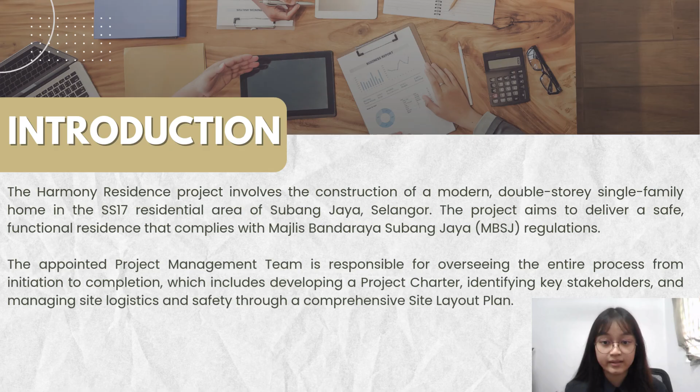The project charter includes some key components: project background, objective, scope, stakeholders, risk, and constraints.

For the background, the Harmony Residence System project was born from a need for a modern 3,000 square feet double-story home in Petaling Jaya for our client, Mr. John Smith. Our goal is to provide a smart, energy-efficient home that stands out in the current market.

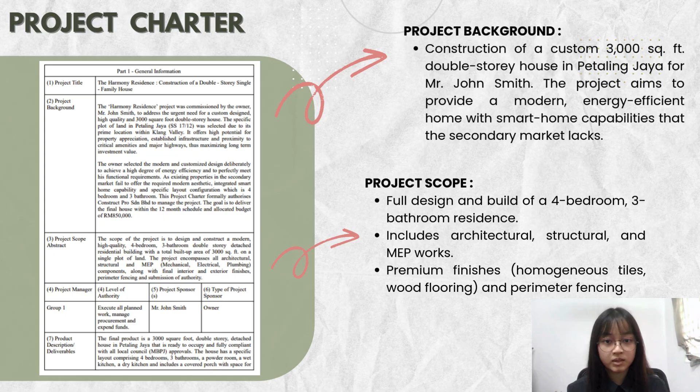The scope is comprehensive. We are delivering a full design and build for a 4-bedroom, 3-bathroom residence system. This includes all architectural, structural, and MEP work finished with premium materials like homogeneous tile and wood flooring.

Next, the project objective. We have defined 3 clear success criteria for this project. The first is time: we aim to complete the build and secure the certificate of completion and compliance within 12 months, specifically by 31 December 2026. For the cost, we are committed to staying within a strict budget of 850,000 ringgit. For safety, our target is zero accidents or lost time injury throughout the entire construction phase.

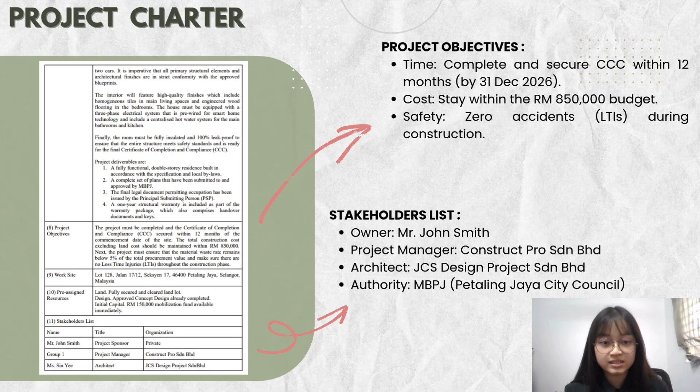To achieve this, we have assembled a strong team, which includes the owner, Mr. John Smith, Project Manager Construct Pro Sendirian Berhad, Architect JCS Design Project Sendirian Berhad, and the Authority MBPJ, which is Petaling Jaya City Council.

For the component of project constraints, first we are operating under a fixed budget of 850,000 ringgit. This is a hard cap, meaning our resource allocation and procurement must be incredibly focused to avoid any overrun.

Second, we have a strict operational window. Construction and on-site activity are limited to Monday through Friday, from 8 a.m. to 6 p.m. We have no weekend or after-hour flexibility, which puts a premium on daily productivity.

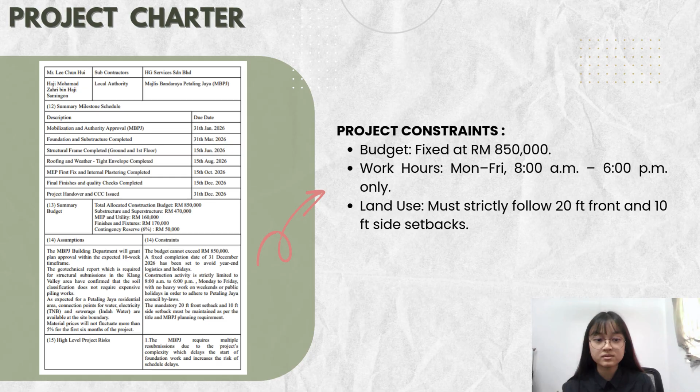Finally, from a regulatory standpoint, we must strictly adhere to land use setbacks, specifically a 20-foot front setback and 10-foot side setback. This is non-negotiable for MBPJ approval.

Now, let's look at the risks we need to manage to keep this project on track. We have identified 4 key areas of concern.

Firstly is permit approval. Our first hurdle is potential delay in MBPJ permit approval, which could put back our start date. Secondly is neighbor complaints.

Since we are in a residential area, noise and dust are major factors. Too many complaints could lead to fines or a forced stop to our work.

Next is traffic congestion. Traffic in Petaling Jaya is a real challenge. This can cause delivery delays for critical materials like concrete and steel.

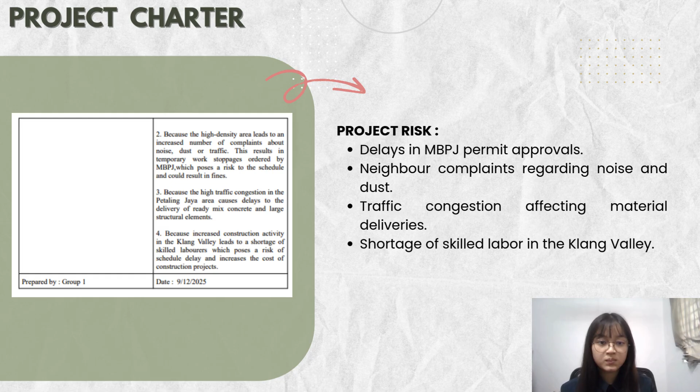For labor shortage, finally there is a high demand for skilled workers in the Klang Valley right now. This makes it harder to find the right team and could increase our costs.

In this section, we identified the key stakeholders for the Harmony Residence project to ensure clear lines of authority. We have classified them into 2 groups.

First is internal stakeholders. This includes our client, Mr. John Smith, who provides the capital, and ourselves, Group 1, acting as the project management team responsible for execution.

Next is external stakeholders. These are our partners and regulators. We work closely with Ms. Xin Yi, our architect, to ensure all designs meet MBPJ standards enforced by Haji Mohamad Zahri. For the actual build, we have appointed Mr. Lee Chun Hui from HG Services as our main subcontractor.

In this part, we established a functional organization structure. At the top, we have the project sponsor, Mr. John Smith, who holds the ultimate authority. Reporting directly to him is our team, Construct Pro Sendirian Berhad, acting as the project manager.

We serve as the central hub, coordinating with Ms. Xin Yi, architect, for design and technical issues, MBPJ for regulatory compliance, and HG Services for the actual physical construction on site. This structure ensures that all instructions flow through the project manager to avoid confusion on site.

For this communication flow section, we established a communication matrix to manage the tight 12-month schedule and the residential site constraints. Internally, we have daily briefings with our subcontractors to ensure safety and workflow on site, and weekly technical meetings with our architect to resolve design issues quickly.

Upwards, we report to client Mr. John Smith on a monthly basis regarding budget and schedule performance. Externally, we have a critical line of communication with MBPJ for milestone inspections and with the neighbors to manage compliance regarding noise or dust.

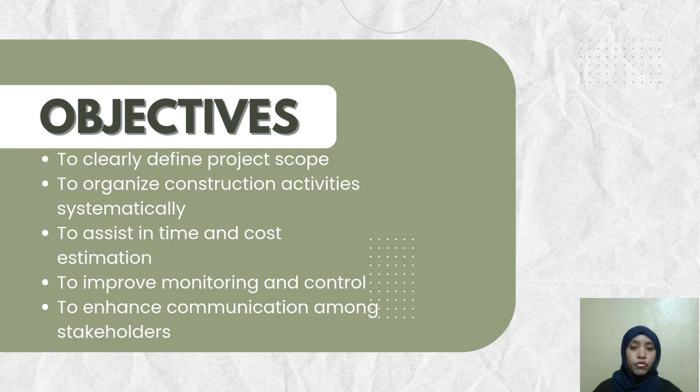The WBS for this project is organized into 7 principal levels corresponding to major phases of the construction life cycle. Each level is further subdivided into work packages representing specific construction activities. This hierarchical structure enables clear definition of responsibilities, accurate resource allocation, and systematic progress monitoring.

Firstly is mobilization and authority approval. These phases encompass initial project establishment and regulatory compliance. Preliminaries include site mobilization and the provision of temporary site facilities necessary to support construction operation. Statutory approval involves submission to Majlis Bandaraya Petaling Jaya (MBPJ) and application to utility authorities such as TNB, Tenaga Nasional Berhad, Air Selangor, and Indah Water Consortium (IWK). Project management and compliance activities focus on project scheduling, coordination, and implementation of safety, health, and environment systems to ensure adherence to statutory requirements.

Second is foundation and substructure works. These phases comprise all below-ground construction activities. Site preparation includes site clearing, setting up, and excavation works. Substructure construction involves piling operations, followed by the construction of pile caps and ground beams. Foundation works consist of footing, base slab construction, and concrete works, including curing processes to achieve the specified strength and durability.

Third is structural frame. This phase focuses on the formation of the primary load-bearing structure. Ground floor works include the construction of columns, beams, and floor slabs. First floor works involve the erection of upper level columns, beams, and slab construction. Structural quality control activities include reinforcement inspection and concrete testing to ensure compliance with design specifications and relevant standards.

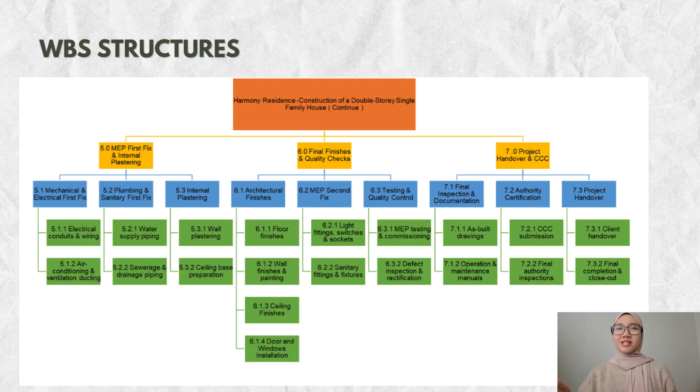In conclusion, the developed WBS provides a comprehensive framework for managing the Harmony Residence project. By systematically decomposing the project into clearly defined phases and work packages, the WBS enhances planning efficiency, facilitates effective monitoring and control, and contributes to the successful delivery of the project in accordance with specified objectives.

Now, I'll explain the site constraint and planning considerations that affect the site layout, construction process, and overall project management. First, I'll talk about the site location and surrounding environment.

The project site is located in a mature residential neighborhood in Petaling Jaya and is surrounded by occupied double-story landed houses. Because of this, the site is highly sensitive to construction impact such as noise, dust, vibration, visual intrusion, and increase in traffic movement. Compared to an isolated industrial site, this location faces much greater public scrutiny, and there is also a higher risk of resident complaints being made to MBPJ, which could result in inspection or even temporary work suspension.

As a result, several site layout controls are required. These include the provision of perimeter hoarding, controlled access points, and effective dust suppression measures. In addition, construction activity must be carefully sequenced to minimize disturbance to surrounding residents, especially during noisy work.

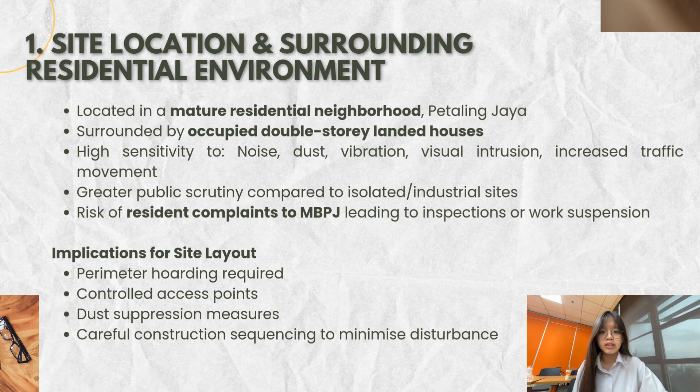Second, I will discuss site access and traffic conditions. Access to the site is via a very narrow residential route. Traffic along this route is moderate to heavy during peak hours, so this creates a logistical challenge for concrete trucks and material delivery lorries as the space is limited. If not properly managed, this situation increases safety risks to nearby residents and other route users.

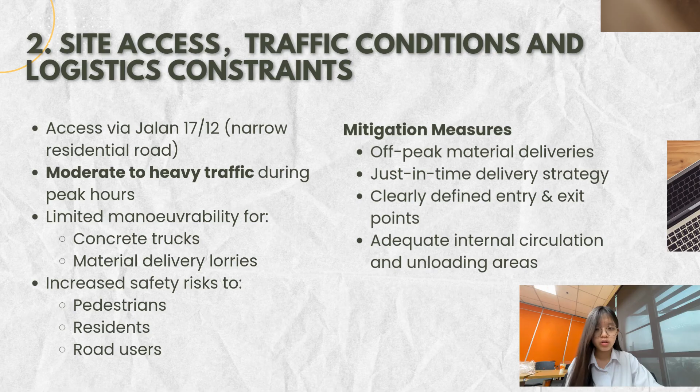To manage this issue, several mitigation measures are proposed. Material delivery will be scheduled during off-peak hours and a just-in-time delivery strategy will be adopted. Entry and exit points will be clearly defined and adequate internal circulation routes and unloading areas will be provided to reduce congestion and improve site safety.

Next, I'll explain the planning and regulatory constraints imposed by the local authority. The project is subject to MBPJ planning and building control requirements, which include a 20-foot front setback and 10-foot side setback on both sides. This requirement reduces the buildable area and usable site space.

In addition, the project must comply with regulations related to noise control, dust suppression, proper waste disposal, and traffic management with appropriate signage. Because of this requirement, the site layout must be carefully planned. Temporary facilities need to be positioned efficiently, and the overall layout design is driven by compliance with statutory regulation.

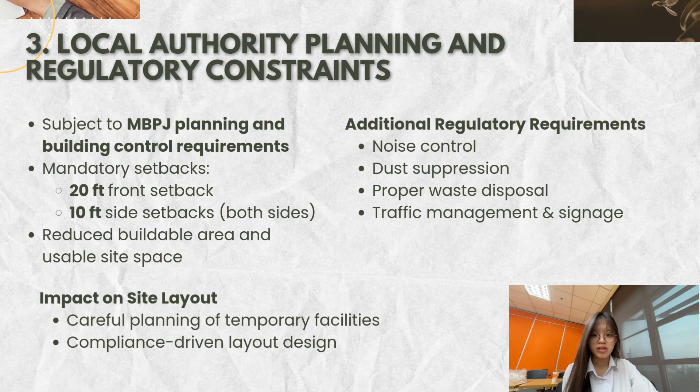After that, I'll move on to working hour restrictions and their impact on productivity. MBPJ allows construction work from 8 AM to 6 PM on weekdays, with restricted work on weekends and public holidays. This restriction limits the time availability for noisy or heavy construction activity and reduces scheduling flexibility, which can affect productivity if not properly planned.

To overcome this, several productivity strategies are adopted. These include an efficient site layout, shorter material travel distance, clear circulation routes, and well-coordinated construction sequencing. These measures help maximize productivity within the permitted working hours.

Next, I will discuss the site space and material management constraints. After accounting for statutory setback, the remaining site area is limited. This space must accommodate the site office, welfare facility, material storage, waste skip, and equipment parking. Due to the space limitation, large-scale material stockpiling is not possible.

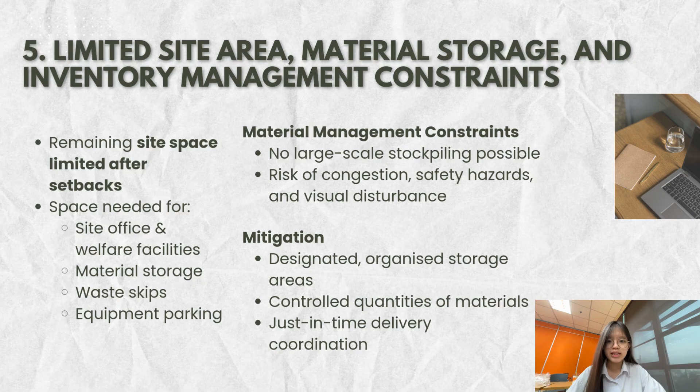Without proper control, this could lead to congestion, safety hazard, and visual disturbance. To address this, designated and well-organized storage areas are provided. Material quantities are strictly controlled, and a just-in-time delivery approach is used to minimize on-site storage requirements.

Lastly, I'll talk about security and public safety considerations. The open residential environment increases the risk of unauthorized access and public accidents, especially involving children. This risk may also result in legal and reputational issues if not properly managed.

To manage this risk, secure perimeter hoarding and lockable material storage, controlled entry and exit points, and clear signage with physical barriers are provided. Overall, this security requirement directly influences the placement of site facilities and the planning of internal circulation routes, making safety and security a key factor in the site layout design.

For this session, I will discuss the comparison of project duration and scheduling among the group members. Although all project plans are developed for the same double-story bungalow, there are clear differences in overall duration and scheduling strategy. The comparison of project duration among group members shows significant variation, even though the scope and building type are identical. The overall project duration ranges from 191 days to 240 days.

Ong Jing Wen's project plan has the shortest duration of 191 days. This is achieved through an accelerated construction approach that overlaps major construction phases. By allowing concurrent activities, the project achieved higher time efficiency and reduced time-related costs. However, this schedule has very limited float along the critical path.

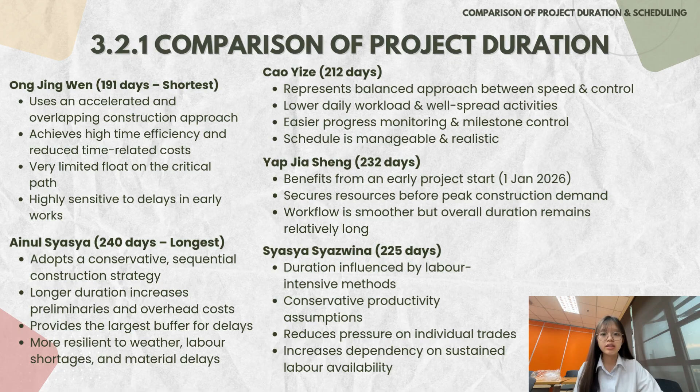Syasya Syazwina's project plan has a duration of 225 days. The longer duration is mainly due to labor-intensive construction methods and conservative productivity assumptions. While this reduces pressure on individual trades, it increases dependency on sustained labor availability and extends the overall project duration.

Ong Jing Wen's project employs an aggressive fast-track scheduling strategy with a high level of task overlap. Finishing work is allowed to begin while superstructure work is still ongoing. This approach maximizes time efficiency and achieves the shortest completion period. However, it requires coordination between trades to prevent site congestion, safety risks, and potential rework.

Ainul Syasya's schedule follows a traditional linear sequence method, where each construction stage is completed before the next begins. This reduces coordination complexity and improves site safety. The clear handover between trades also makes progress easy to monitor. However, this approach results in a longer overall project duration.

Cao Yize's schedule strategy focuses on high-value, low-labor activities with strong emphasis on procurement and the use of specialized subcontractors. The lower work density simplifies monitoring and reduces daily management pressure. However, this strategy increases dependency on timely material delivery, making procurement a critical factor in maintaining the schedule.

Yap Jia Sheng's project adopts a balanced scheduling strategy with logical sequence and moderate task overlap. The early start provided an advantage in securing shared resources before the peak demand period. However, strong monitoring during the early stage is essential to maintain this advantage throughout the project.

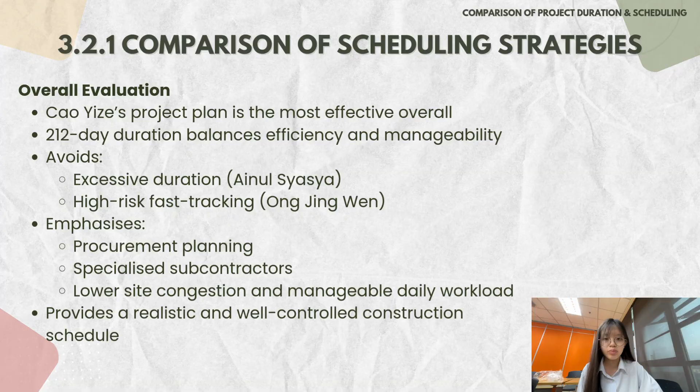Overall, Cao Yize's project plan is considered the most effective among the group members. With a duration of 212 days, it avoids the excessive length of Ainul Syasya's plan while being more manageable than Ong Jing Wen's fast-track schedule. Its emphasis on procurement planning and specialized subcontractors reduces site congestion and daily workload while maintaining steady progress along the critical path.

Moving into our analysis of task sequences, it's important to note that while all team members adhere to the overarching construction life cycle, progressing from preliminary and substructure to superstructure and finishings, there are distinct differences in how each plan approaches the detail and overlap of these stages.

We have categorized our project plans into three distinct strategy approaches. Firstly is the standard sequencing used by Ainul Syasya and Cao Yize. Their plans prioritize a linear flow, ensuring all heavy structural work is 100% complete before finishing work begins. These are traditional, low-risk approaches focused on quality control.

Secondly is mobilization focus. The project plans of Yap Jia Sheng and Syasya Syazwina took a different route, providing a much more comprehensive sequence for site preparation and early-stage mobilization to ensure a robust project launch.

For the aggressive overlapping approach, the project plan of Ong Jing Wen utilizes a fast-track method. In this model, the finishing phase begins while the superstructure is still in progress, significantly compressing the overall project duration.

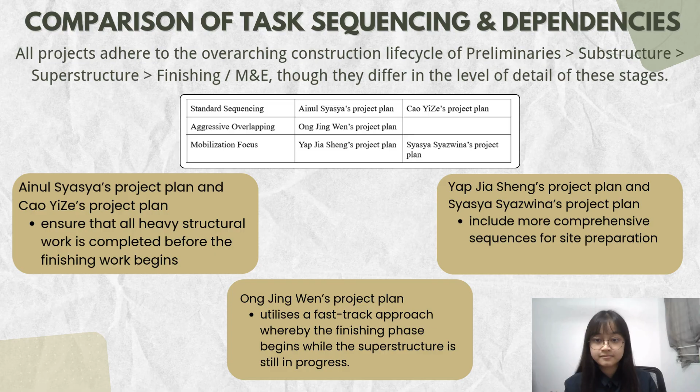Looking at our technical links, all plans correctly use finish to start for major steps like foundation and roofing. This is the safe way to manage handover between workers. We also look at other methods.

For start to start, used by Ong Jing Wen to overlap finish tasks and save time. For finish to finish, used by Yap Jia Sheng for the final stage, linking finishing trades to the final inspection so the project only moves to handover once every small task is 100% done. For start to finish, no one uses this, which is correct because it does not really fit physical construction work.

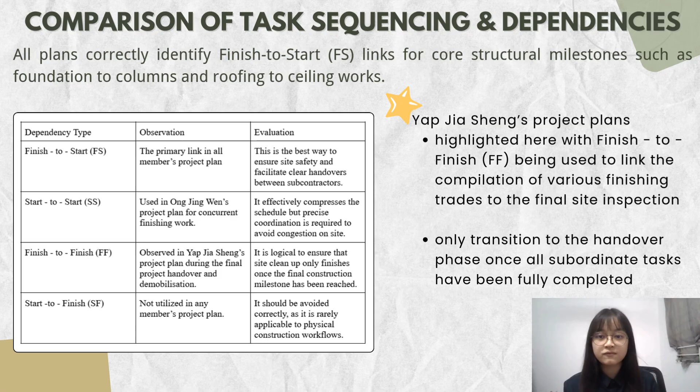In a nutshell, the project plan of Yap Jia Sheng is the best option because she highlights finish to finish being used to link the completion of finishing trades to the final site inspection, and only transits to the handover stage once all subordinate tasks have been fully completed.

For the resource allocation analysis, we compared how each member managed manpower and machinery. We identified three distinct approaches in our group. First, the robust management approach: Yap Jia Sheng proposed a comprehensive engineering team.

While this ensures excellent quality control, we found it offers an opportunity for cost optimization given our specific budget of RM850,000.

Second, the logistic approach: Ainul and Cao Yize provide excellent detail on standard roles and material tracking. Third, the crew-based approach: Ong Jing Wen used specific crew sizes, like a team of 6 masons, to justify the schedule.

In conclusion, we decided to adopt Ong Jing Wen's strategy as the master plan. It was the most balanced model, providing realistic labor numbers without overhiring, ensuring we stay efficient and within budget.

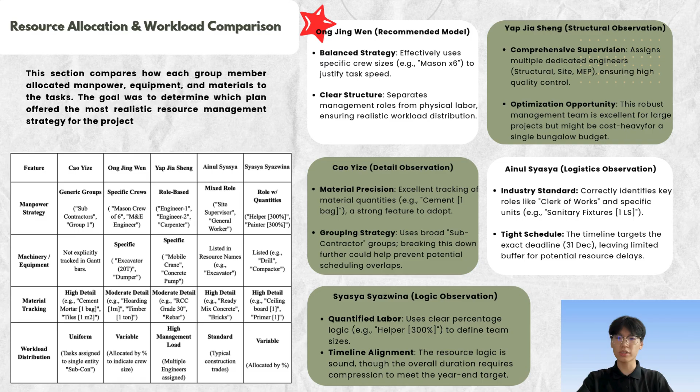Lastly, we're going to make a comparison of milestone and critical path for each member's project. Based on the table above, it shows the project initiation and completion for each member's project. Firstly, Ainul Syasya's project followed an extended, steady workflow over 240 days, allowing for buffer and greater recovery potential for critical path delays.

Monitoring should aim to maintain momentum to avoid dragging into year-end holidays. The next one is Cao Yize's project.

It utilized a high-value, low-labor workflow, focusing on expensive materials and specialized subcontractors, leading to fewer work hours and low work density. This allowed for effective monitoring of key financial milestones, though risks include budget constraints and material delivery delays.

Next is Jia Sheng's project. It employs an early-start balanced workflow, beginning right at the start of the year to secure resources and avoid February congestion. Monitoring should focus on meeting milestones in January and February.

Next is Ong Jing Wen's project, which features a fast-track workflow with a compressed timeline of 191 days and a heavy workload, making it the most brittle. Daily and aggressive monitoring is necessary as minor delays could jeopardize the completion date.

Lastly is Syasya Syazwina's project. It is labor-intensive with a significant focus on manual labor. Its large number of work hours complicates monitoring, with potential for time and budget leaks if labor productivity drops.

In conclusion, we can see that Cao Yize's project is the most manageable, while Ong Jing Wen's project is efficient but requires intensive monitoring to stay on track.

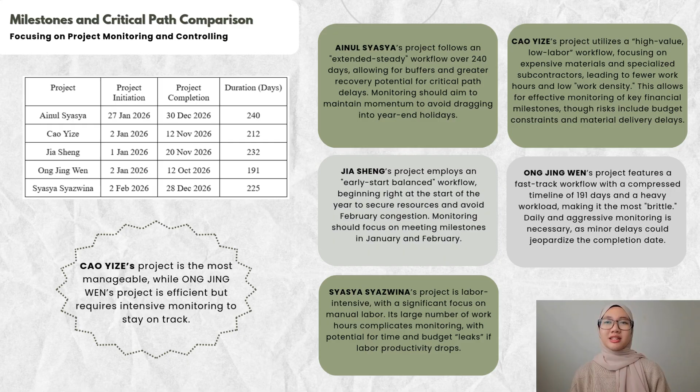For the Harmony Resident double-story bungalow project, there are 5 alternative schedules evaluated, aimed at identifying the most realistic and achievable schedule. The evaluation criteria are: firstly, project duration, scheduling strategy, task sequence, dependency logic, resource allocation, and lastly, critical path management.

Cao Yize's project plan is selected as the best schedule because it is the more realistic and achievable option. It is also supported by balanced duration, logical sequencing, manageable risk, and effective monitoring.

For the project duration comparison, Cao Yize's plan, at 212 days, is balanced, while Ong Jing Wen's plan at 191 days is too fast and high risk. For Ainul Syasya, it required 240 days, taking more time and higher cost. So balanced duration can reduce delay risk.

For scheduling strategy, Cao Yize's project plan requires a high-value, low-labor approach, focusing more on subcontractors, which benefits include less congestion, easy coordination, and lower supervision. It is more stable than a labor-intensive plan.

Next is task sequencing: a linear construction sequence going with preliminaries first, then substructure, superstructure, and lastly finishes. The benefit is less rework, improved safety, and better quality. It also prevents overlapping, which increases risk.

Next is dependency logic, which is mainly finish to start. It also ensures logical work order. The benefits are a safer work environment, clear handover, and better workmanship.

For monitoring and controlling criteria, Cao Yize's project plan has low work density, more focused on procurement and financial control. The project also has easy tracking and early risk detection.

For fast-track plans, close supervision is needed. Lastly, resource allocation: Cao Yize's project plan has strong material tracking with a limitation of labor. The improvement that can be made in this project plan is to add a new role classification and maintain schedule logic.